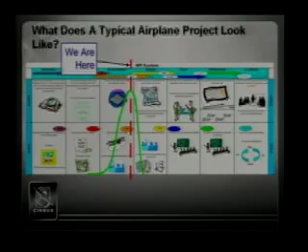Then you move on to the design. The design is kind of the heavy lifting, where the real design comes from. Right now, I would say this is where we are in the program - the red line is really where we are. We are in the transition from what Steve called the rapid prototyping stage, from the concept and development stage into, we're going to certify this airplane and we're going to make it happen now.

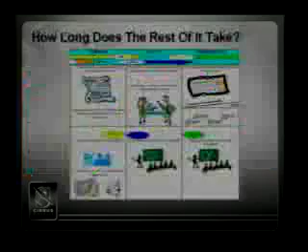Now, I put the little distribution in there because I'm an engineer, and everything's really a continuum - there's no absolutes. So some of the work has progressed further and some of it lags behind. That kind of explains that. The next question when you look at that is, holy cow, they're only half done. And that's what you think, but we're not half done.

The design part of this, the pilot part, and production - you care about production, everybody cares about when we actually get the airplane built. But most of the hours actually go into the design part. The design part culminates with a flight test airplane that's through flight test, and we get our type certificate. The interesting thing about the design part is that it's really resource driven, whereas those first three phases we've gone through are really calendar driven, driven much more by the amount of time it takes to learn.

So anyhow, how are we going to finish this? The critical path in this project is really about, the first part of it, the design, tooling, and fabrication of the flight test and ground test vehicles. That's the hard part. Then we've got a flight test program, and then since it's a jet now, we have a new requirement we've never had before called functional and reliability flight testing, which means we basically have to build production units and operate them 200 or 300 flight hours with FAA personnel on board, and they determine whether or not we designed it well enough to go into service.

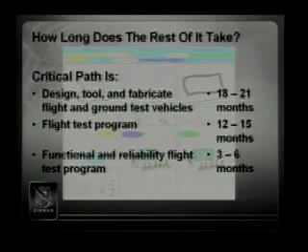So anyhow, you can get your calendar calculators out here now. This is what we really think the program is going to take at this point. This phase is going to be 18 to 21 months. We're thinking 12 to 15 months of flight test and another 3 to 6 months to do the F&R testing. So when you add all that up, that puts us somewhere squarely between April '12 and January '13. That's truthfully where I think we are in the program, and I think that we are actually staffed to do that at this point.

Back to this - okay, so we finished design, but we've got this whole pilot phase to go through before we start producing airplanes and you all start getting your airplanes.

Well, the Cirrus way is to do the pilot program during the design phase. So by the time we build the flight test airplane and enter flight test, we will be converting that to production tooling. We'll be building production pilot airplanes. Our plan is the day we get the type certificate and finish the functional and reliability testing, we're ready to start delivering airplanes and ready to start producing airplanes. That's basically been our MO on every project I've ever been on at Cirrus, which is all of them.

So the next question is, what have we been doing for the last year? Dave wants to talk about this. Thanks, Paul.

Well, to sum it up, we've been flying V1, our flight test vehicle 1. To talk philosophically a bit about what V1 is: it's not the airplane we intend to put into production, but it's a critical tool to help us determine the configuration of the airplane we will ultimately produce. It started out as a fairly quick concept, and as we've been flying it, we've learned an awful lot about the design and about how good our analysis and estimating techniques are.

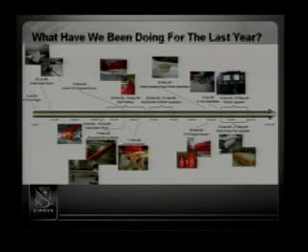In the fall of '08 we installed the spin chute, and we've also been experimenting with different nozzles, which plays into the flying qualities a lot and also the performance of the airplane.

We also looked at simulated ice boots. Those were installed to gauge the relative cruise performance impact boots would have, and helped us tailor a very refined laminar flow boot installation, where we changed the wing shape, the wing airfoil shape, to accommodate the boots so that we have very little reduction in drag.

We've also been looking at Dutch roll qualities of the airplane and looking at different stabilizer shapes. We've ultimately come to something we've called the X-tail, and I have another slide on that - I'll talk a little more on that. Also, we've put vortex generators on.

We've just installed new avionics. We've also installed a different configuration flap, which should save about 30 to 40 pounds over a conventional tracked Fowler flap system. So we've been pretty busy.

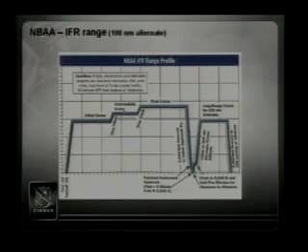I'm going to talk a little about some of the performance results we've been getting from our flight test airplane, just to give you a picture of the capability of the airplane. But first, I want to describe the NBAA IFR range profile. When comparing this jet to a piston airplane, there's a fundamental difference in how you calculate range. With a jet, you also have to consider a 100-mile diversion to an alternate for a small jet, whereas with a single-engine piston, it's generally absolute range with a 45-minute reserve. So this 100-mile difference makes the direct comparison a little difficult. But I've got a slide showing what the SR-22 would look like with this NBAA IFR range profile.

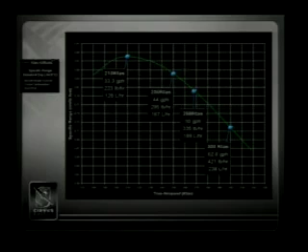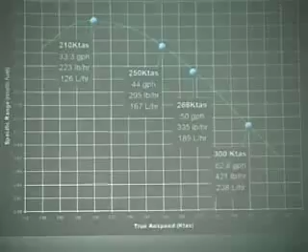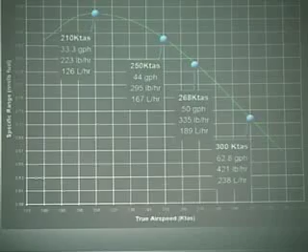This is a little bit of an eye chart. The specific range of the airplane is a function of airspeed. Basically, our fastest cruise speed is at a higher fuel flow with shorter range, around 300 knots, and the slowest, highest-range speed is around 210 knots, burning about 33 gallons per hour. It carries about twice the load of an SR-22 at that speed, and it's an airplane that's roughly twice the size. So it has a similar basic efficiency to that airplane, but with the added thrust, you can go much faster.

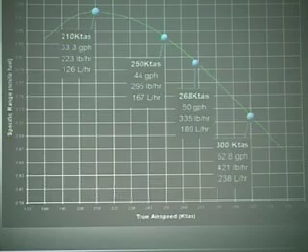So what this looks like in terms of cruise performance versus payload versus range might be kind of hard to see in the lighting in this room, but we've got a blue line here which represents the highest speed, and a green line which represents the lowest speed. Lowest speed, of course, gives a little over 1,400 miles range with full tanks and about 400 pounds of payload. And then the highest speed gives a little bit more than 400 pounds of useful load and about a 1,000-mile range at that speed.

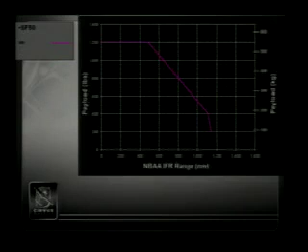So I just want to focus in on this 300 knot number, which is our fastest number. This is the one that we've been talking about the most. We want to be able to go about 1,000 miles at about 300 knots and carry about 400 pounds.

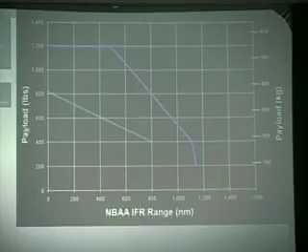When we compare that to the SR-22, we can see basically the difference in the capability, range and payload. The SR-22 is down here at roughly 200 knots, with that NBAA range just short of 800 nautical miles for the same 400-pound payload, versus the jet, which with that same 400-pound payload at 300 knots will take you over 1,000 miles. So quite a bit more capability with the jet.

Touch on some of the design improvements, lessons learned from the V1 test airplane.

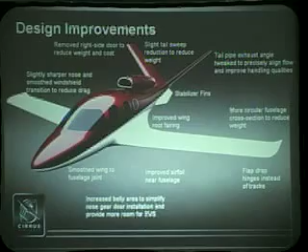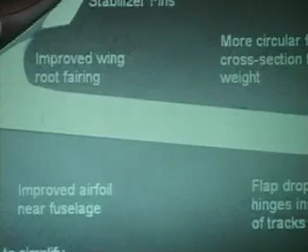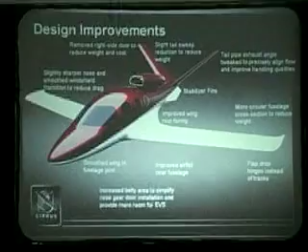We've smoothed the wing to fuselage joint, and there's a lot of work that's typically done on airplanes in this area. But basically that comes in two parts. One is the shape of the fairing between the wing and the fuselage. The other is the shape of the airfoil, the inboard section of the wing. As the air flows around the fuselage, that flow field is disturbed over what a wing is traditionally designed with, with no fuselage, so it's in clean air. But once you disturb that with the fuselage, what the airfoil sees is different. So we've shaped the inboard section of the wing to accommodate that flow field around the fuselage, and that results in a significant reduction in drag.

We've added stabilizer fins. We'll talk a little bit more detail on that. We've changed the sweep and position of the stabilizers. That is done to reduce weight and improve the handling qualities.

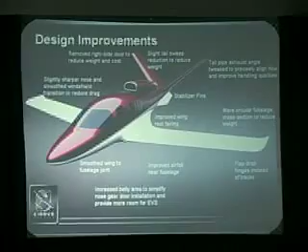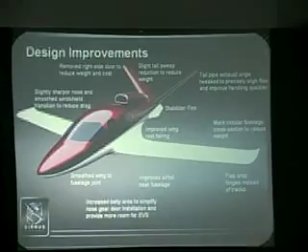We also removed the right side door. Our initial prototypes and concepts had two doors, but we've found that accommodating that is a significant increase in empty weight of the airplane. So the reduction in complexity makes it a more reliable airplane and able to carry a lot more weight.

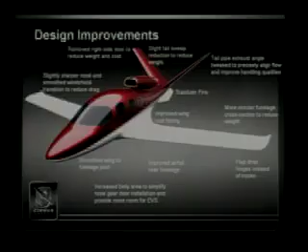We've changed the shape of the nose, and there's a number of reasons why we've done that, but one of the things is to allow us to install the EVS camera flush. When the airplane was originally designed, the concept of EVS wasn't part of the program. So we've added that, and we want to make it a good low drag installation. There's also some benefits in air conditioning packaging, CAPS packaging, landing gear, etc., that changing that nose shape gave us.

We changed the design of the flaps, as I said, and the purpose of that was to take about 30 or 40 pounds out of the airplane and also result in a much more reliable, less complex, safer system.

We've changed the exhaust nozzle, and we're still iterating on that, and that's a trade-off between handling qualities and cruise performance.

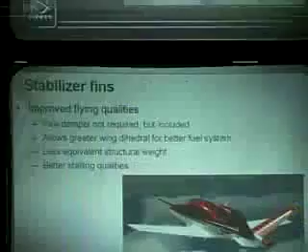We'll talk a little bit more about stabilizer fins. The last slide, I could probably go on and on all day about a lot of these details, but the detail that I generally like to talk about these things are not interesting to most people. But the stabilizer fins is one that it's immediately visible. It's probably one of the most significantly easy to recognize changes that we've made to the airplane. We've had 2 or 3 different configurations on the plane, as well as 50 plus configurations that we've looked at in computational fluid dynamics models.

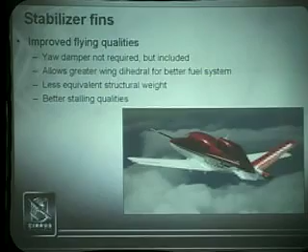The result of this is we ultimately want to make the airplane the lightest possible airplane. And one of the ways to get the lightest possible airplane is to put the smallest size of tail on it, which also reduces drag and makes it a faster airplane. But when you do that, you also result in an airplane that doesn't have as good of flying qualities.

Another aspect of the V-tail is it has a very strong dihedral effect. So a gust of wind to the side or a side slip will make the airplane want to roll into that side slip. That stability is generally good, but coupled to the tail, you can get a Dutch roll characteristic that is more undesirable.

One way to combat that is to put a smaller dihedral on the main wing. But we don't want to do that, because we want as much dihedral as possible to improve the handling qualities, as well as to reduce the unusable fuel capacity of the airplane. So there's a big matrix of trade-offs you want to make to build the best possible airplane.

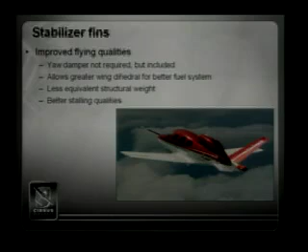One of the nice things about this dual tail, dual stabilizer fin design, which we've been calling the X-tail — because if you look at it straight on from the back, it looks like an X from the stabilizers, the main stabilizers and the stabilizer fins — is that it reduces dihedral effect. It takes away some of that adverse dihedral effect we get from the V-tail and returns that in the form of better handling qualities with a lighter weight structure.

There's another side benefit: by having a horizontal component to those stabilizer fins installed down low on the airplane, at high angles of attack they become much more effective and make for a better pitch-down moment in the stalling regime. So we get a double benefit from those: better stalling qualities and better yaw qualities.

Okay, now it's my turn again.

Airplane programs — you hear about airplane programs. Let's talk about the 787 for a second. It's a horrible airplane program, right? It's years late, way over cost, and now it's on to another delay. Eclipse was year after year of delay, promises and delays. The A380 — probably three-quarters of the airplane programs we know of in our time had really serious problems. Airplane programs get in trouble because people want too much.

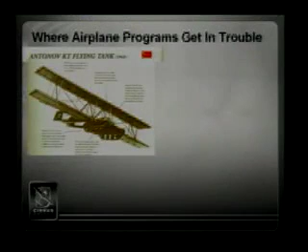One is the airplanes get way too heavy — people can't estimate the weights properly, or it's harder to do than they thought. Another is they have complex aerodynamics, or a lot of drag, or a need for really high installed power. Those become unsuccessful airplanes — you just never get them to work.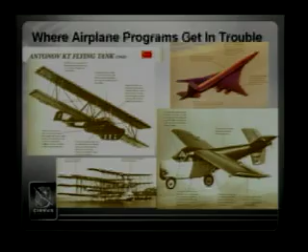Some airplanes are too complex and too expensive, or just maybe ill-conceived. That's my favorite one, by the way. I think they must have had a stall speed problem.

But we're no different. We're an airplane program like every airplane program since the Wright brothers. We fight weight, we fight drag, and we fight cost. They're all opposed to each other — it's always a trade-off between those things.

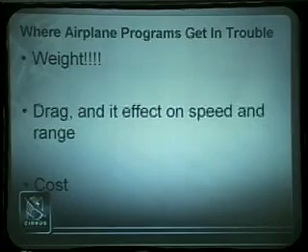So where are we relative to these things that kill airplane programs? Well, the weight status — the last updates that Mike and Alan did, I think they promised a 3,700-pound empty weight for a typically equipped airplane. Our objective right now in the program is 3,600 pounds, and we're 55 pounds over, at 1.5%.

I think the 1.5% is going to be pretty easy to get back. What we really want is something less than 3,600 pounds. But we're going to get that — we just finished a full-scale wing test on a development wing.

This is something most airplane companies would not do. We built a structural test wing and tested it, purposefully underbuilt it, and tried to predict the failure. What we learned is that we can take a significant amount of weight out of the wing.

At the same time, we're evaluating a concept to build a single-piece pressure hull for the fuselage, which would take out all the structural joints in the pressure section of the fuselage, and we can get a bunch of weight out there.

And then finally, we drive weight targets down to the subsystem and engineer level, and we manage the team with a goal to reduce those weights. We're not going to let this airplane just turn out to be however heavy it turns out — we're going to manage this thing to the end.

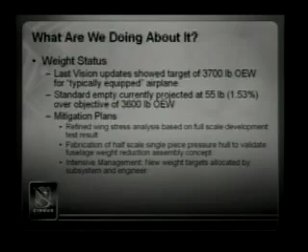Drag — the drag situation, I think, really looks quite good. The V1 performance is really only about 3% total drag shy of what it needs to be for us to meet the range goals.

I don't know if you guys looked closely at that X-tail picture. The back of the fuselage was tufted, and in 1G level cruise flight, half of those telltales were standing up. They weren't flowing back, so that wing root fairing and the inboard wing contain quite a bit of drag.

In fact, we think probably as much as 9 or 10 drag counts, as the aerodynamics people talking drag counts would say. But what we really want is to go into the design with a 3% margin, because as airplanes mature, they only get heavier and they only get slower. So we've got to start from a place where we're going to meet those goals.

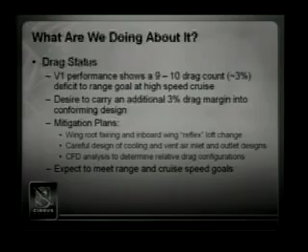And the way we're going to do that is through this inboard wing loft, the wing root fairing. A lot of drag can be designed into an airplane from cooling, bleed air sources, air inlets and air outlets, so we're going to manage those carefully.

And we have the advantage now of a relatively sophisticated computational fluid dynamics analysis that lets us compare design changes and get relative differences in drag. We may not predict absolute numbers perfectly, but we get great relative numbers, and we can choose lower drag configurations without having to go fly and guess. So I fully expect to meet the cruise range and speed goals, and I'd be surprised if we didn't beat them.

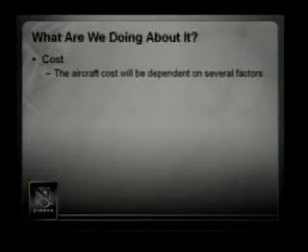Cost, the big question. When I think about what the price of the airplane is going to be to the customer, at that point we're going to have a bunch of sunk cost.

So at that point, it becomes dependent on what the bill of materials is, what the direct labor component is, what the manufacturing overhead component is, and then the last thing is the rate that you build it at - how many can you produce in a year.

This was the Eclipse model, right? They're going to make 1,000 airplanes a year or something, and so they're going to be able to make them really cheap.

Well, we understand the direct labor component and the manufacturing component. It scales almost exactly from the airplanes that we build now. We have a great factory, we produce efficient airplanes.

Our bill of materials cost, I'll talk about in a minute, but the rate is really the big question. The rate that we produce them at, whether it's 100 a year, 250 a year, or 400 a year, will ultimately determine the steady state price in the market.

So the bill of materials cost for the airplane - when Mike Van Staagen and Alan Klapmeier conceived this airplane, I don't know how many years ago it was, probably before I was born. But when they started getting serious about it, they did some estimates on what it would cost. They tried to scale what they knew from the SR-22, and tried to understand what else goes into a jet.

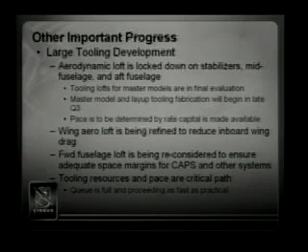And the forward fuselage, we're considering adding some more volume up there because we want to make sure the parachute fits and we don't want to do this twice. But the important thing is that the tooling resources we have and the pace we can build tooling at, the queue is full. So we have time to continue working on and refining these lofts without jeopardizing the program or the pace of the program.

CAPS. CAPS is probably the biggest challenge on the airplane. Nobody's really ever attempted anything like this. What you see here is scaled - the lower parachute represents the SR-22 parachute.

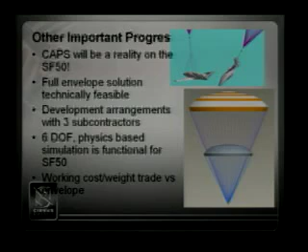The upper will be the SF50. It's 89 feet in diameter. And it is going to happen. We have studied this with several development arrangements with subcontractors. We have good models of this. We have a system that we know will actually work.

We have several options for it, and we have a physics-based simulation model that predicts the SR-20 test deployment performance. We can put in the aerodynamic and stability derivatives, the inertial properties for the SF50, and the parachute properties. Now we can design this system so we know we can do it.

So where we're at with it now is we're trying to decide the cost and weight trade-off of that system versus how much of the total aircraft operating envelope we want to protect. Our goal is to try to protect the envelope up to cruise, which is a much different and much more difficult goal than we had with the SR22 and SR20. Cruise can be up to 300.

This is going to be a very interesting system, but I'm really pleased with the progress made in the last year on this system. We will be in the wind tunnel with parachutes this fall, and I think this winter we'll be, as Dale said, bombing the desert. We have parachutes being fabricated for drop test at this point. So this system is progressing very, very well.

This is kind of a fun thing, but think of the SF50 as a natural evolution from the SR22. This airplane is going to happen. It's happening. For people that didn't believe it could be done, I had my doubts several years ago too. I'm here to tell you this is going to happen.